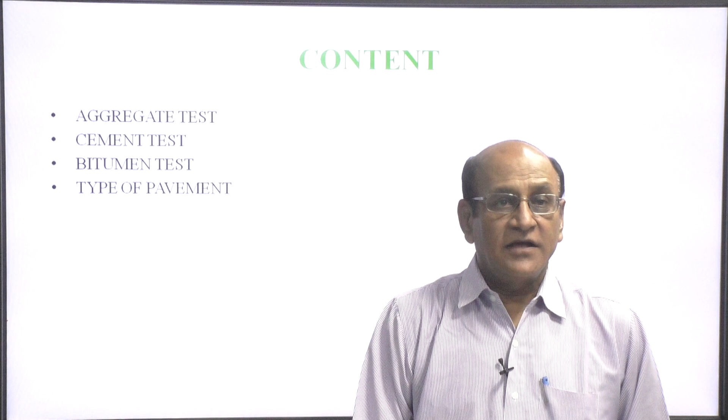There are 4 types of tests carried out for the construction of highways. These are the pre-tests, which include subgrade test (soil test), aggregate tests, cement test, and bitumen tests. We have already covered subgrade test, that is, soil test.

Now we are going to discuss aggregate tests. There are various types of tests required for the aggregate used in the construction of highways, like strength, toughness, hardness, durability, shape, gradation, water absorption, specific gravity, and bitumen adhesion.

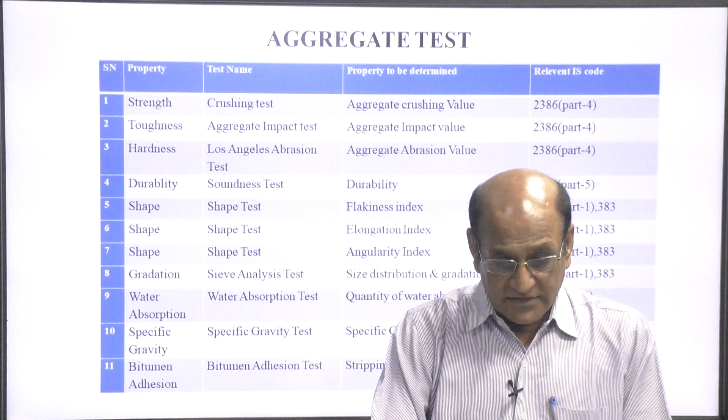These are the properties required to test before starting the work. Here is the chart showing what properties are required, the name of the test, the property to be determined, and the relevant IS code by which we conduct the experiment. We will discuss one by one.

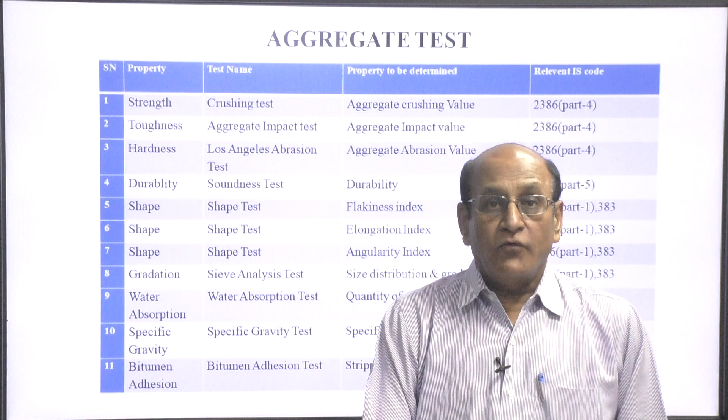The first is strength, and strength is carried out by the crushing test. The value we get is the aggregate crushing value, and the relevant IS code is 2386 part 4.

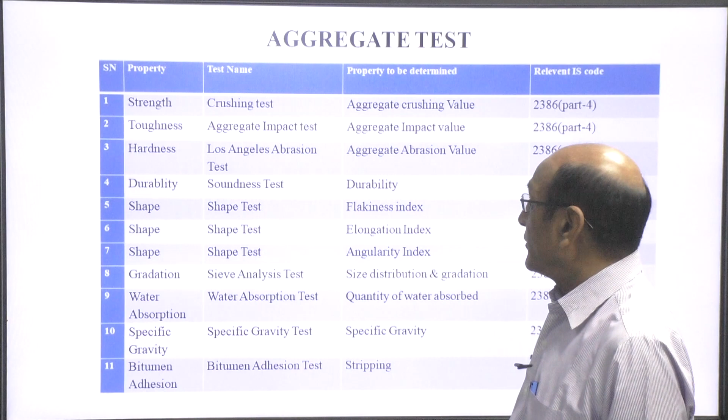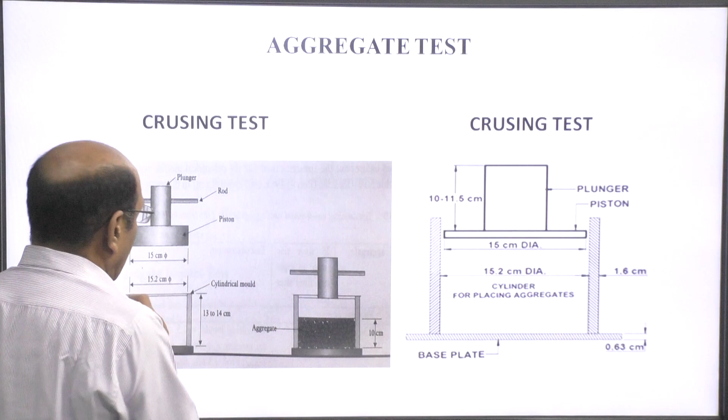This is the cylinder mold that we have already discussed. The sample placed in the mold is 10 centimeter. This is the aggregate, means the sample.

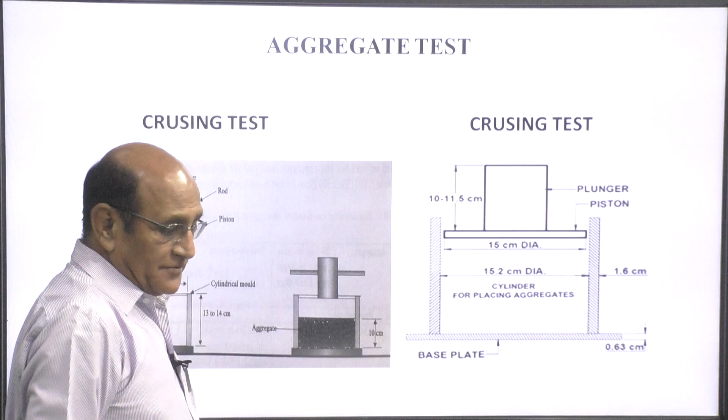The sample that we have taken for the test should pass through a 12.5 mm sieve and retain on a 10 mm sieve.

First of all, we place the sample in 3 layers, and that has been compacted by a tamping rod with 25 blows, done in 3 layers.

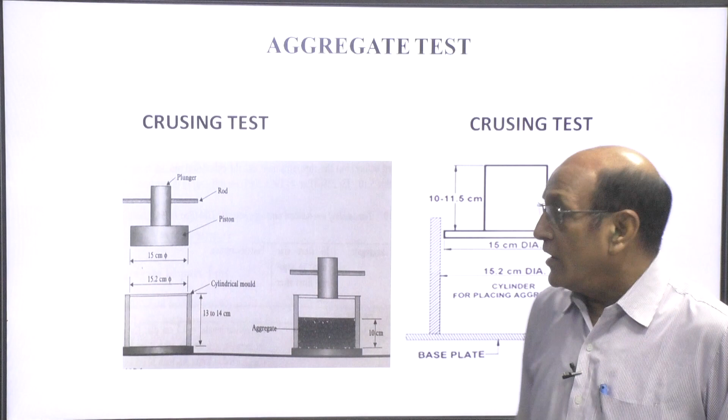After placing and compacting the aggregate, the load is applied through the plunger, and 40 ton load is applied at the rate of 4 ton per minute, up to 40 ton.

After application of the load, the sample is withdrawn from the cylinder and passed through a 2.36 sieve. The passed material is weighed, and the crushing value is obtained by the weight of the sample passed through the 2.36 sieve divided by total sample weight, multiplied by 100.

For bituminous work, the crushing value should not be more than 30%, and for granular base and sub-base, it should not be more than 45%. So this is our crushing test. Now, next is the impact test.

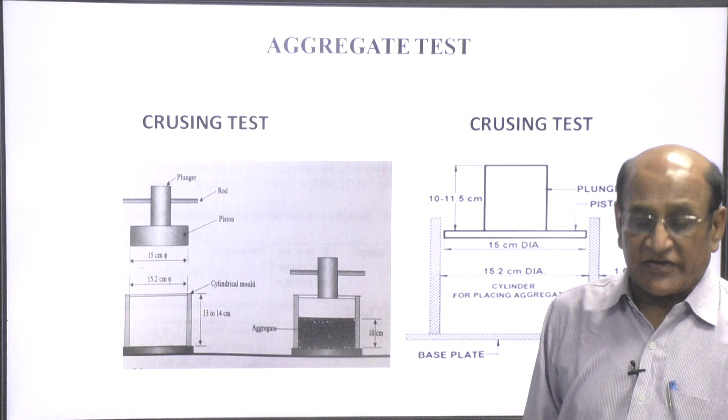Impact test is very important for road construction because the vehicle will impact the road surface when there is a pothole or a speed breaker. So impact load comes on the pavement surface, and that should be evaluated before starting the work.

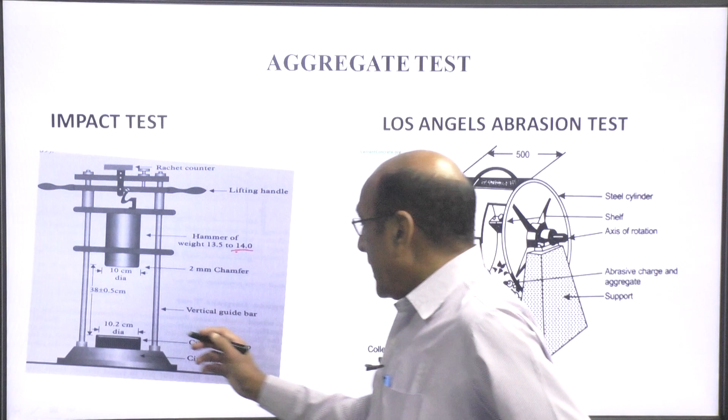The sample is again passed through a 12.5 sieve and retained on a 10 sieve. The sample is again compacted in 3 layers of 25 blows.

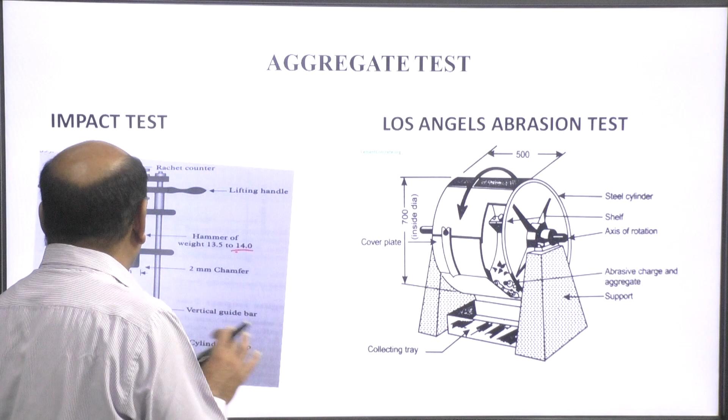Now the hammer is released through the vertical guide bar for 15 times, and again the sample is withdrawn from the cup and passed through the 2.36 sieve.

Again, the impact value shall be the weight of passed material through the 2.36 sieve divided by the total weight of the sample, multiplied by 100.

For bituminous work, the impact value should not be more than 35%, and for other types of work, means granular work, it should not exceed 45%. So this is the impact test.

Now the third one is the Los Angeles abrasion test. There are two types of shearing action going on the pavement surface. First is called abrasion and second is attrition. When two materials like wheels and the pavement surface rub, that produces abrasion, whereas the mutual rubbing between the aggregates is attrition.

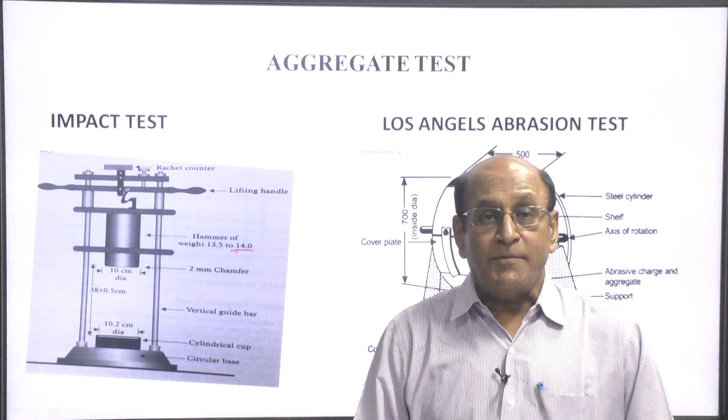This is very important because this type of action is going on all the time on the pavement surface. So this should be tested by three methods: the Los Angeles abrasion test, the Deval abrasion test, and the Dorry abrasion test. We will discuss the Los Angeles abrasion test.

Here there is a cylindrical steel cylinder having 70 centimeter diameter, width 50 centimeter. This is the shelf and this is the axis of rotation. These are the chargers, generally 12 chargers are put in the cylinder to create a simulation of the actual site.

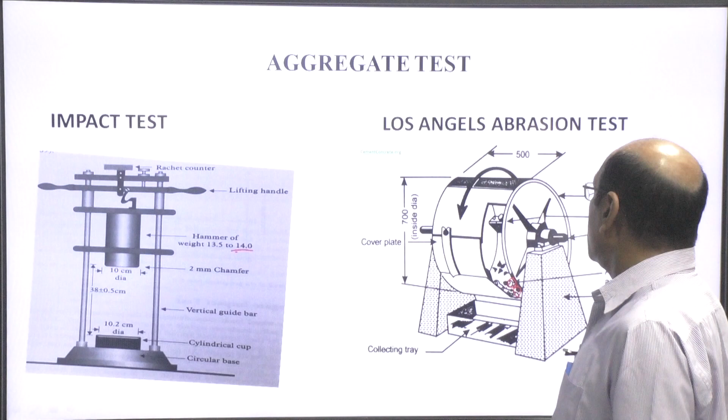The diameter of this charger, a steel ball, is 4.8 centimeters and weight is 390 to 445 grams. Generally 12 balls or chargers are kept in this cylinder. This is the cover plate by which we can load or unload the sample. This is the axis of rotation.

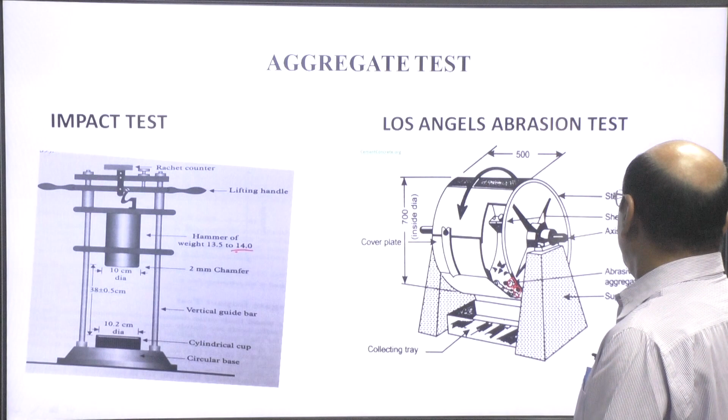So, 5 to 10 kg samples are kept in the cylinder, and then this is rotated at the rate of 30 to 33 rpm, and 500 to 1000 revolutions are made for our tests depending on the conditions imposed.

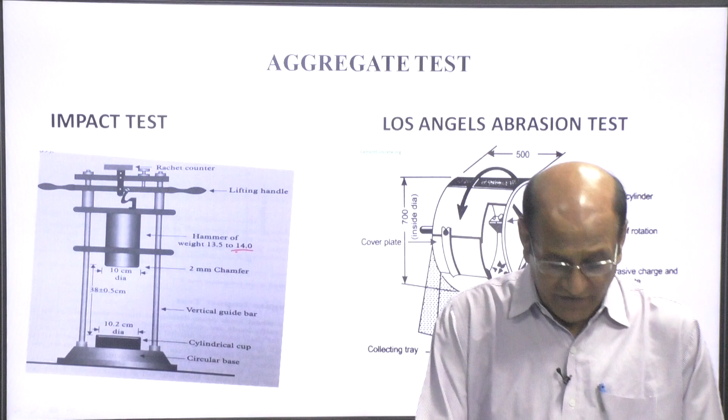So now after the approved number of rotations, the abraded sample is withdrawn from the cylinder, and then it is passed through a 1.7 mm sieve. The abrasion value is the weight of abraded sample passing through the 1.7 mm sieve divided by total sample, multiplied by 100. That gives the Los Angeles abrasion value, and for base course that should not exceed 50%, and for high quality work that should not exceed 30%.

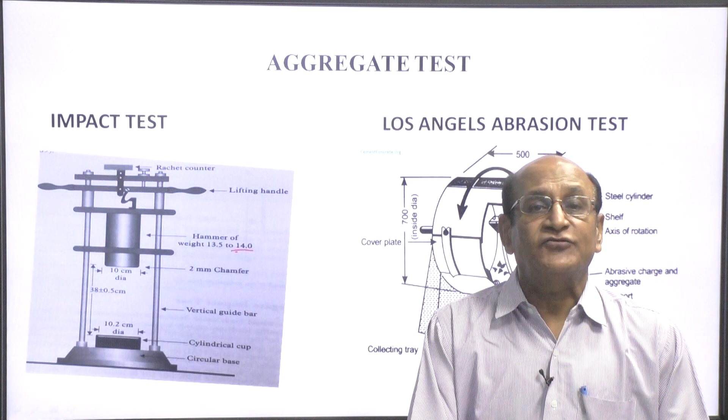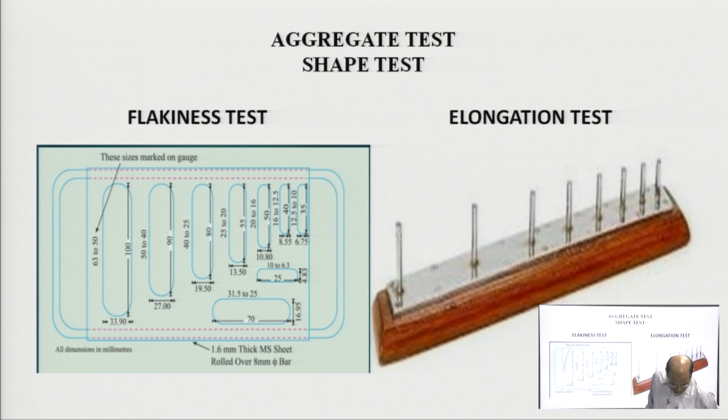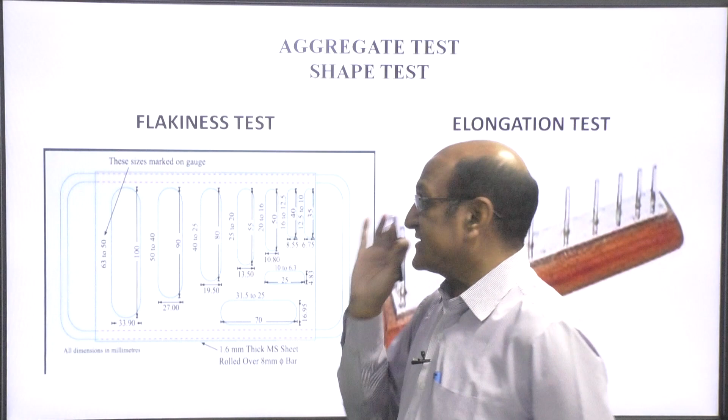The flakiness index is the percentage by weight of the aggregate whose least dimension is 0.6 of the mean dimension of the aggregate. So this is a slot of 3 by 5, the mean dimension, through which the stone aggregate is passed, and the value is calculated as the weight of the sample passed through the slot divided by the total sample, multiplied by 100. By this method we can calculate the flakiness index.

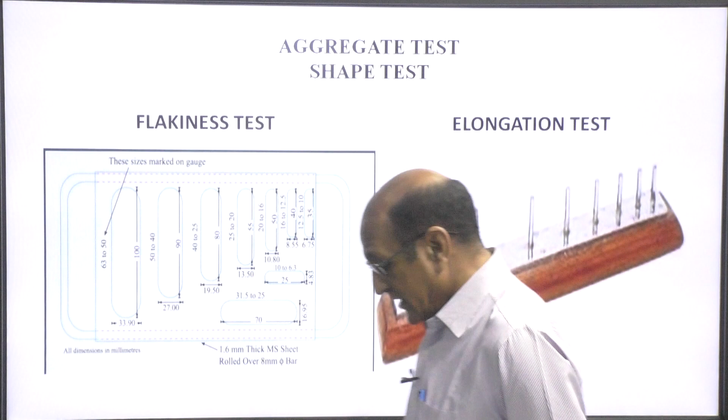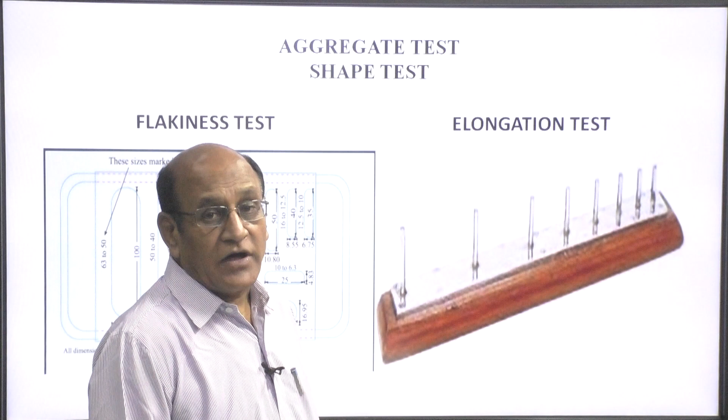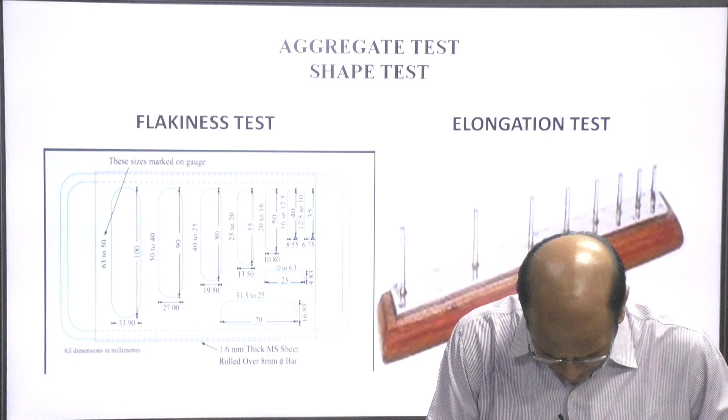This is the elongation test. It is the percent by weight of the sample whose greatest dimension is 1.8 times the mean dimension. By this method we can calculate the flakiness index and elongation index, and the maximum limit for both should not exceed 15%.

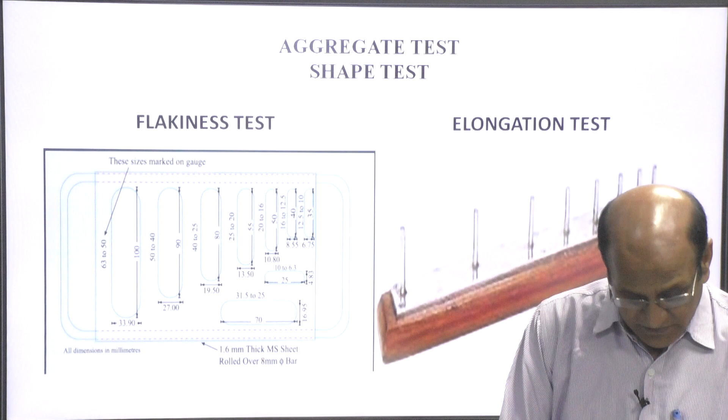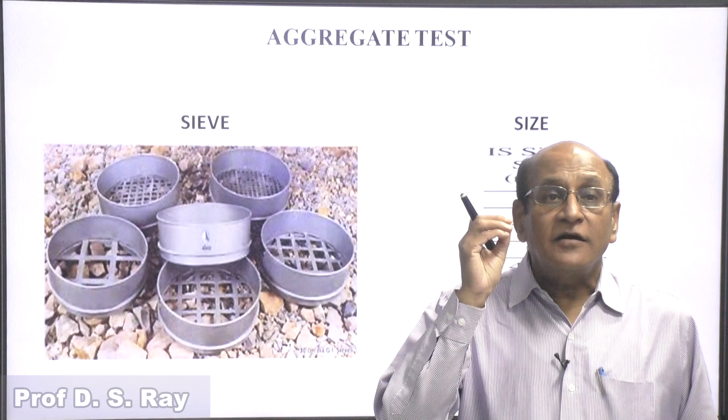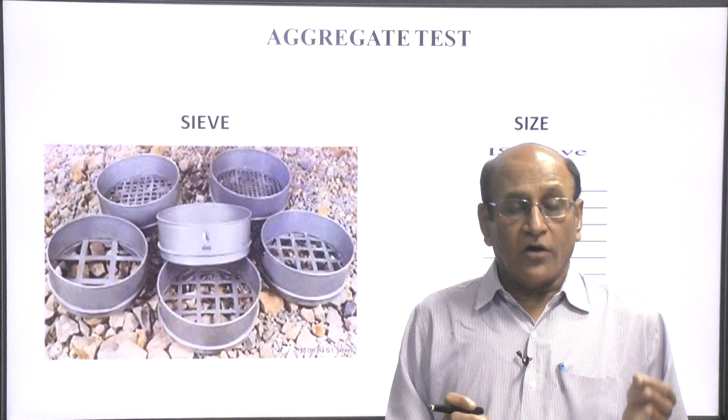For the purpose of testing aggregate, the range which is required is selected, and one extra top sieve and one extra bottom sieve are also placed for the sieve analysis. After putting the sample in the sieve, it is placed over the shakers and the sample is properly shaken, then it is withdrawn and tested again. The weight passing divided by total sample gives the percentage of material passed through a particular sieve. So this is the sieve analysis.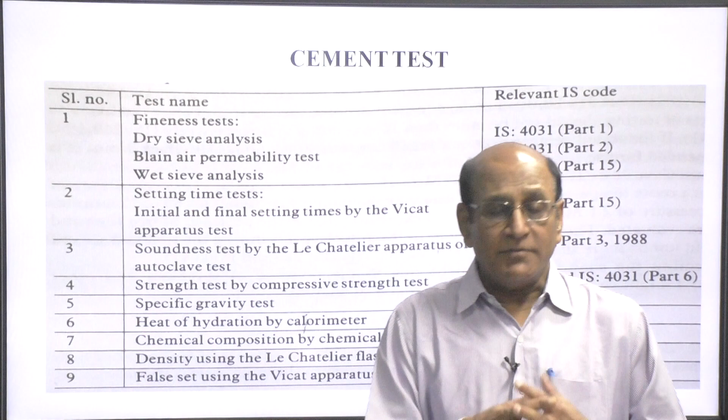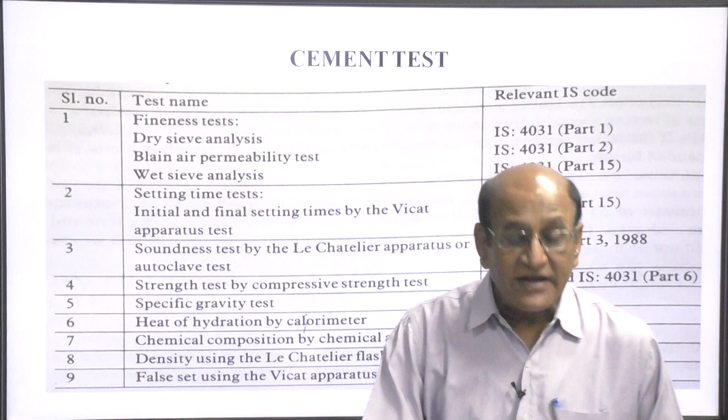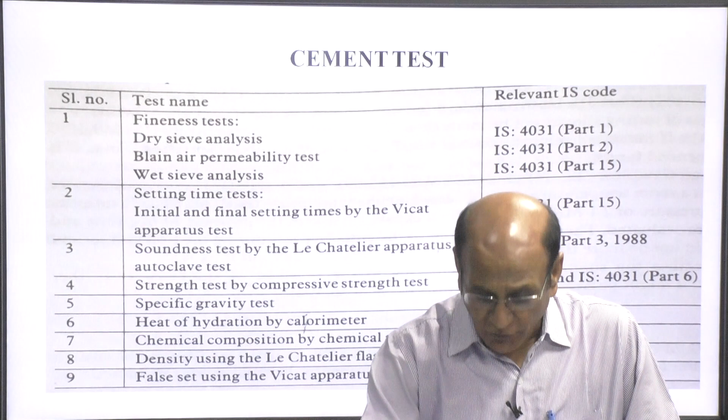Now come to the next test, cement, which is very important because it is used for construction of rigid pavement, the main raw material being cement. Even in flexible pavement, some structures like bridges and culverts are constructed with cement. We will discuss the different tests here, with the relevant IS code also given, starting with the main tests, which is the fineness test.

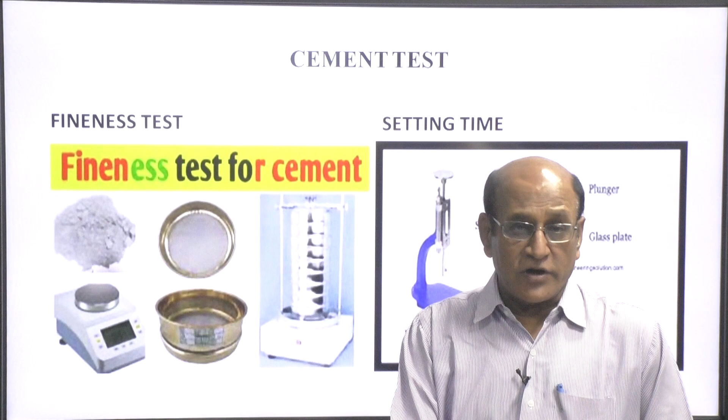This is the fineness test which has been carried out. This is cement and these are the sieves. A 100 gram sample is allowed to pass through a 90 micron sieve, then it is sieved for 15 minutes, and the percentage of passing is calculated. The residue should not exceed 10% for OPC or any Portland cement, 5% for RHC and 5% for PPC. This is a simple test, but it is a must to carry out before starting the work.

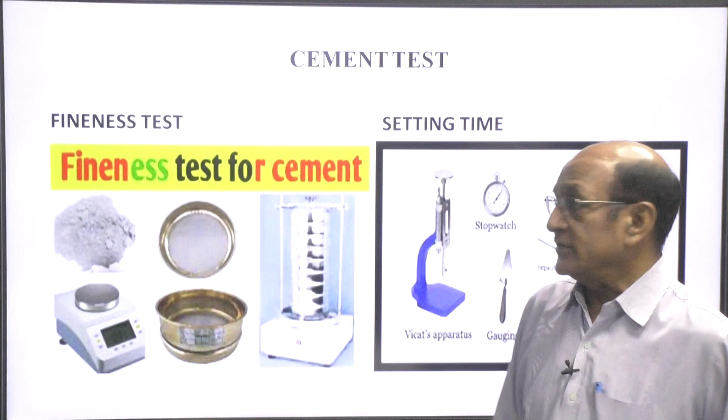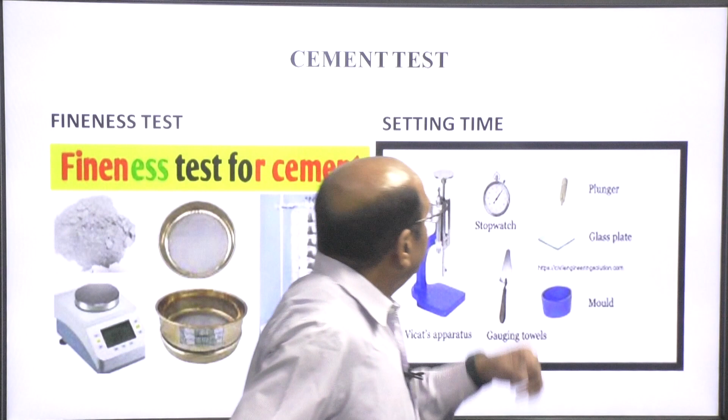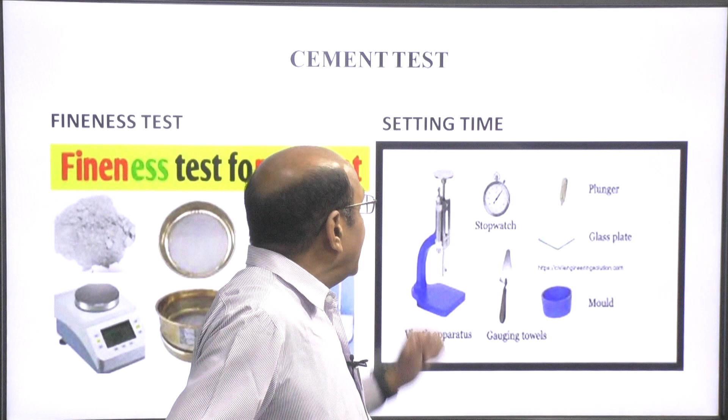The second test is setting time, which is also very important. This is the Vicat apparatus by which we test the setting time: the plunger, glass plates, molds, and a stopwatch. For setting time, the solidification of the plastic cement paste stiffens to such an extent that the Vicat apparatus needle will only penetrate the sample up to 5 plus minus 0.5 mm. That is the initial setting time.

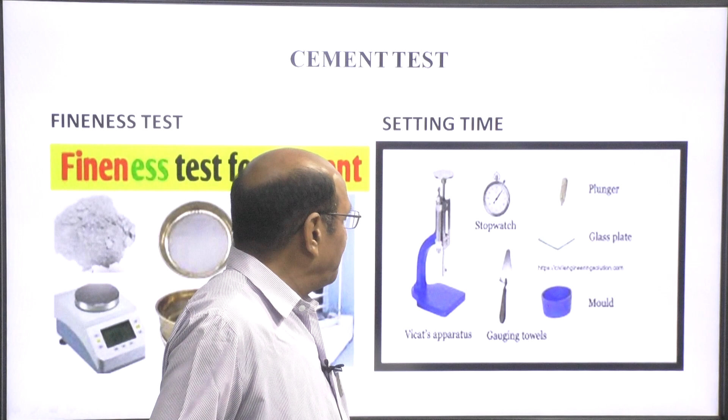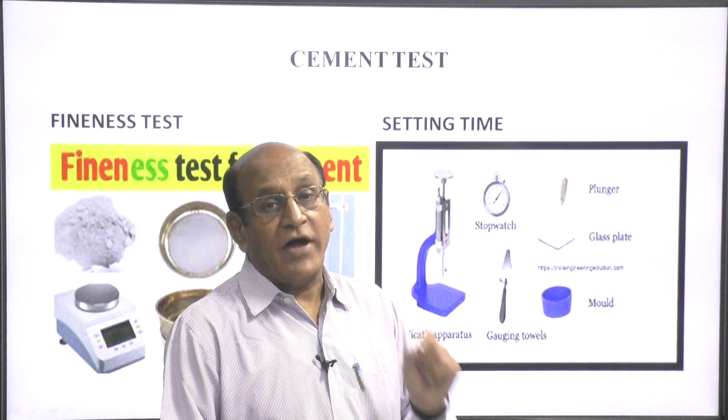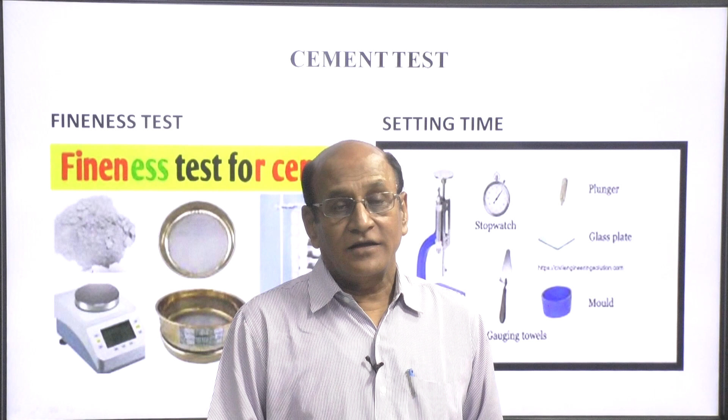This is the mold. The mold diameter is 5 centimeters and the thickness is 4 centimeters, in which cement paste is placed. For the final setting time, if the needle is released to penetrate the sample and it does not mark, that time is the final setting time. It means at the final setting time we cannot change the shape of the structure made by the cement. So this is the setting time: initial setting time and final setting time.

Then there is the soundness test, which is a very important test, because if your cement is not sound, there will be a wide change in volume, which creates a great problem for the structure.

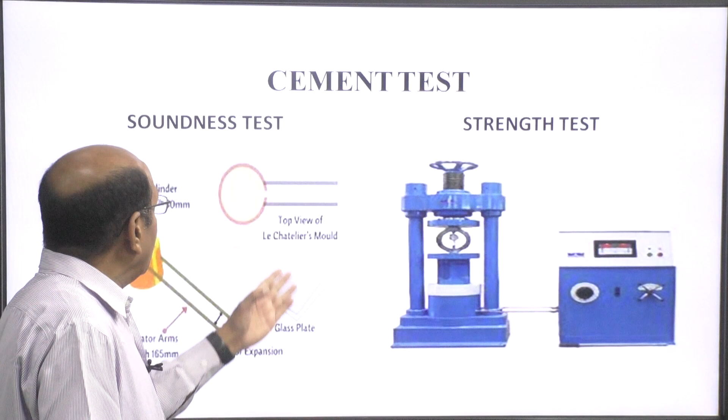This is the split cylinder, 30 mm dia and height is also 30 mm. This is the indicator arm of length 165 mm, the length of expansion. This is the glass plate, top view of the Le Chatelier mold, because this test is carried out by the Le Chatelier principle, using the Le Chatelier mold.

So what happens: the mold is placed over the glass and filled with cement paste, 100 grams of cement and 0.78 times of water, then covered with a glass sheet and submerged in water at 27 to 32 degrees for 24 hours. Then the mold is taken out and again submerged in boiling water for 3 hours, cooled down, and the distance between the indicator points is measured.

The difference between the indicator points will show the soundness of the cement. This is the soundness test and it is a very important test, because if there is unslaked lime or slaked lime, it will create a problem when water comes in contact with the cement residue.

The next test is strength. The specimen is a 70.6 mm cube having 5000 square mm of surface area. A 1:3 ratio of cement and sand with water is mixed at 27 plus minus 2 degrees centigrade, with a quantity of cement of 185 grams, sand 555 grams, and water P/4 plus 3.0, where P is the water for normal consistency.

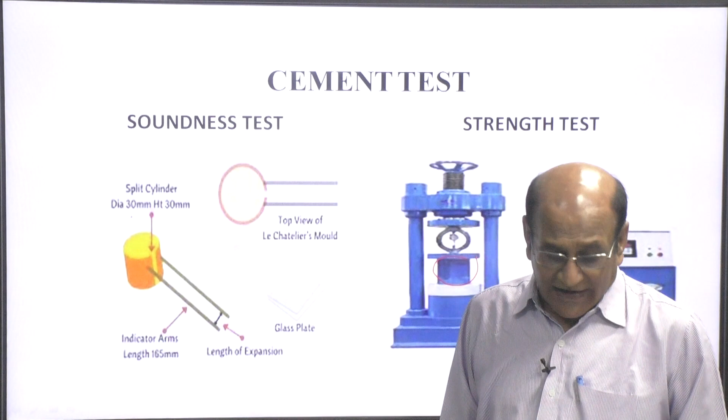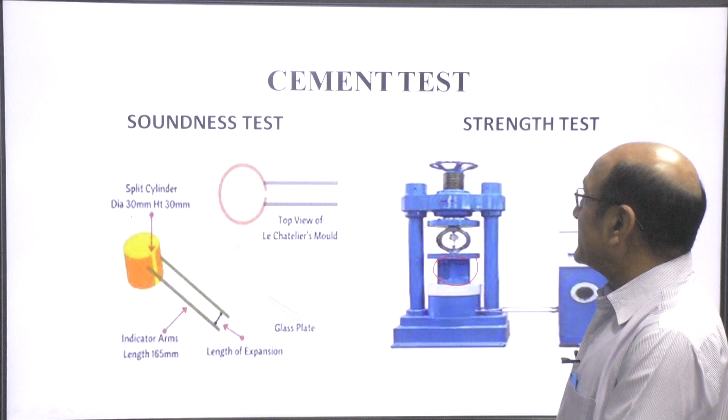Now the mold is filled with the paste. The vibration table is allowed to shake for 2 minutes, and after removing it, the mold is placed over the compression testing machine. The load applied is 35 Newton per square mm per minute. The strength is found by the total load divided by the area, which gives the stress, the strength of the cement.

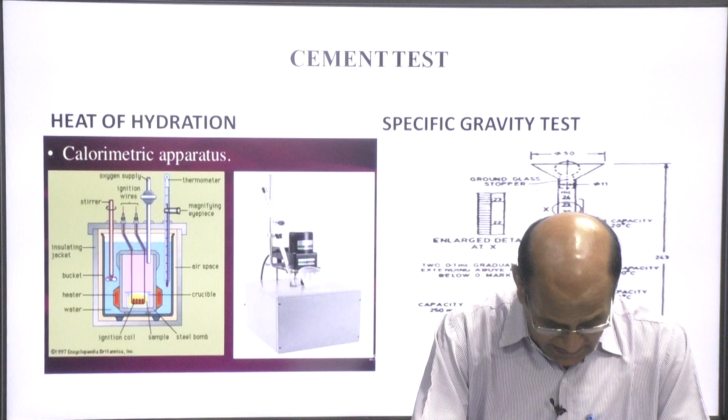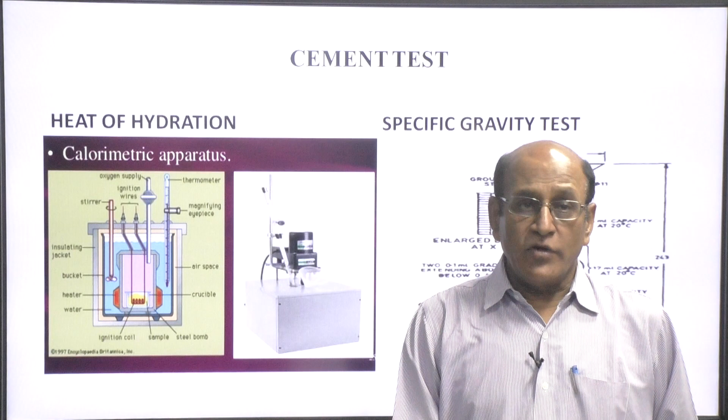The next test is heat of hydration. There are many stages for the heat of hydration. It is calculated using heat capacity, corrected temperature, weight of the sample, and ignition loss, calculated across different stages. Finally we come to the conclusion of heat of hydration, because it is a very long experiment, so we will conclude by just showing the sample here. This is the calorimetric apparatus by which we calculate the heat of hydration.

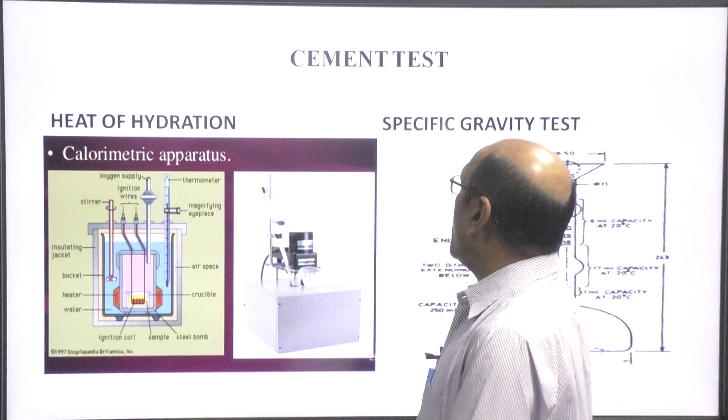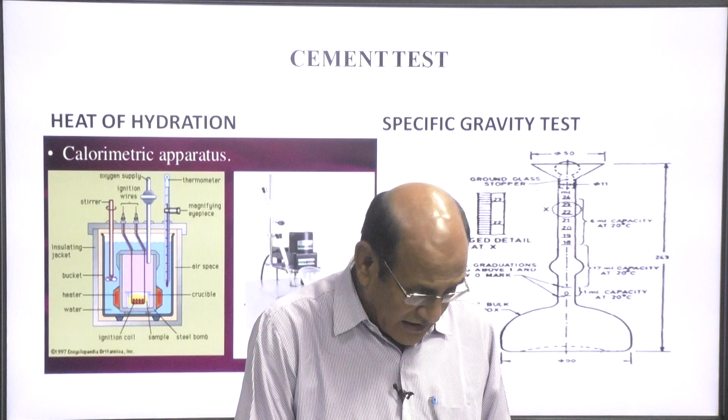The next test is the specific gravity test. The specific gravity is found by the weight of the cement divided by the displaced volume of liquid in milliliters, which gives the specific gravity.

There are many tests carried out for cement, but for practical purposes these tests are only carried out in the field.

Now we come to the bitumen tests, and there are many bitumen tests which are carried out. These include the needle penetration test, softening point test, flash and fire test, viscosity test, ductility test, float test, loss on heat test, solubility test, spot test, water content test, TFO test and RTFO test. These are the tests generally carried out for bitumen.

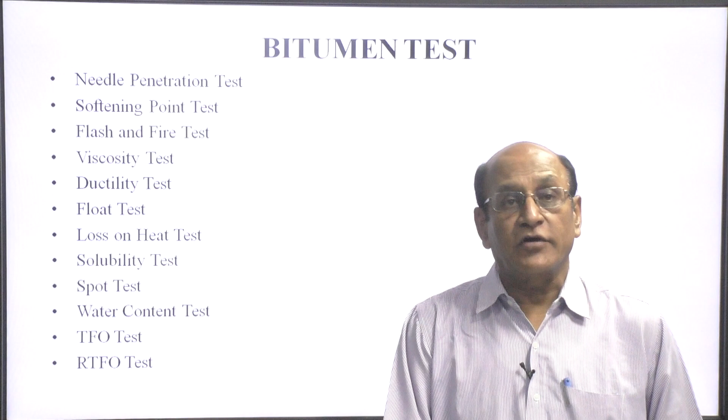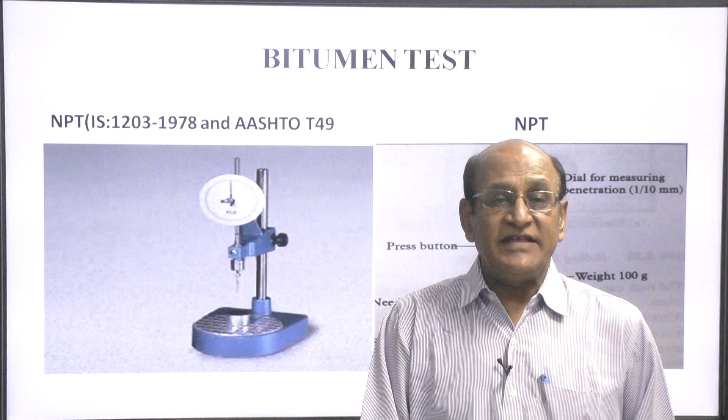We will discuss these in brief. This is the needle apparatus for the needle penetration test, and bitumen is named after the penetration value, like penetration grade 80 by 100, meaning the needle penetration lies between 80 and 100. This type of test has been carried out and bitumen named after this penetration value. But now all Indian companies like Indian Oil Corporation, HPCL, BPCL have changed, and now bitumen is named based on viscosity grade, VG grade, like VG 20, VG 30, VG 40. So the naming has changed, but this is still the very basic test.

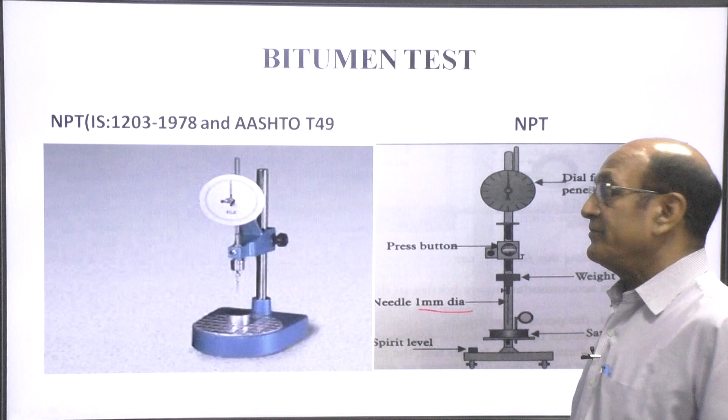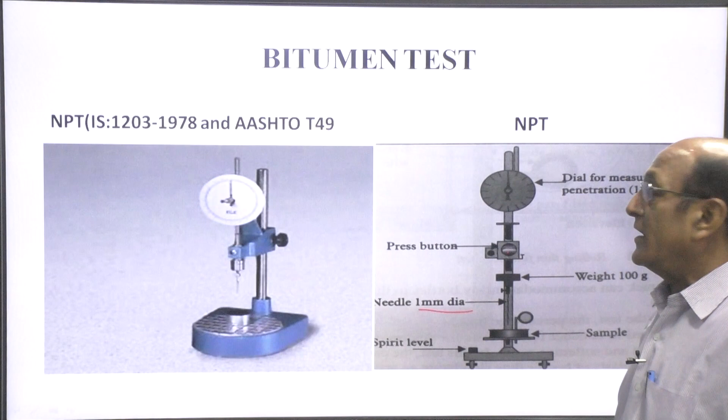Here you see the 100 gram weight and the needle, which is 1 mm. This is the sample placed in a cup, and this is the dial for measuring penetration, calibrated not in millimeters but in 1/10 of a millimeter. The sample is placed below the needle, which is positioned just above the sample level. Then this press button releases the weight, and after 5 seconds it is pressed again, so it stops at once. The dial gauge then represents the penetration value in 1/10 of a millimeter.

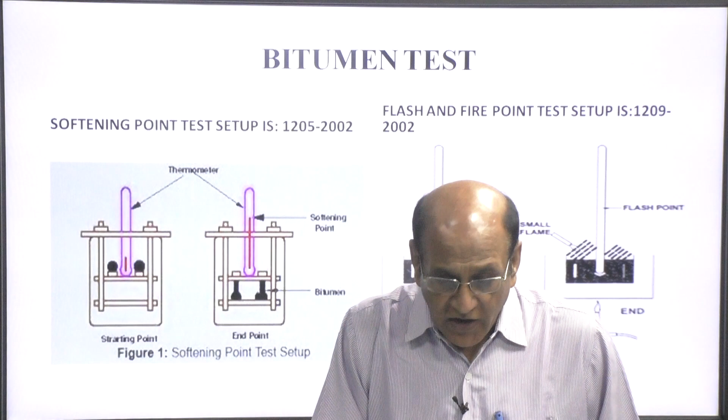This is the softening point test setup in which the softening point is calculated. This is the flash and fire point test. This is the minimum temperature at which, for a very small instant, there is a flash, and at the fire point there is ignition.

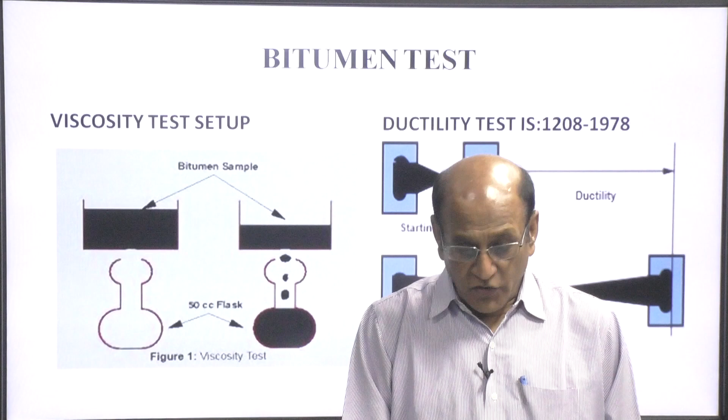Then the ductility test, in which the sample is pulled 50 mm per minute up to the end point when the thread breaks. That gives the ductility value.

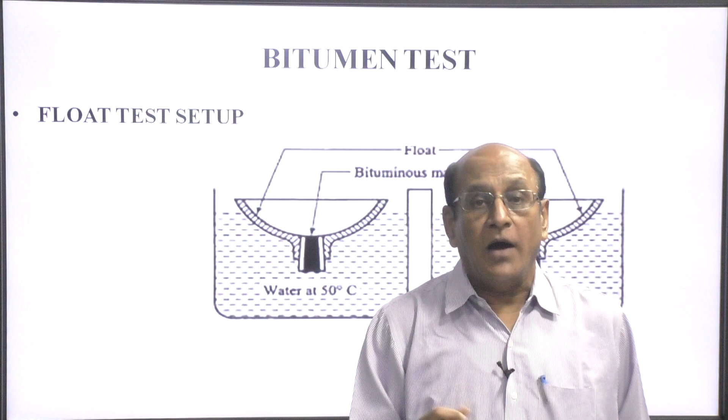This is the float value test. There is a brass and aluminum float in which the sample is kept, and it is kept in a water bath at 50 degrees, forcing water to come up. That time gives the float value.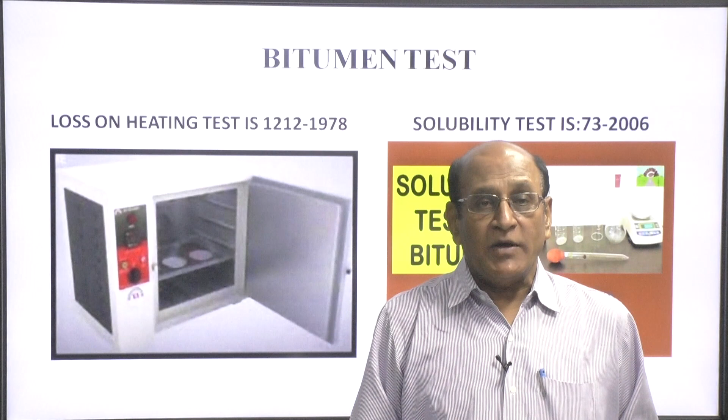The solubility test - the bitumen is made soluble in carbon tetrachloride or carbon disulfide, and the residue gives the solubility value.

This is the spot test. A 2 gram sample is dissolved in naphtha, and a drop of this solution is placed on paper. After 24 hours, if it shows a regular color, it is uncracked; if there is some deformation in shape and color, then it is cracked.

For the water content test, any water content present is heated and the vapor is collected, then cooled down to recover the water. This gives the water content, which should not exceed 0.2%.

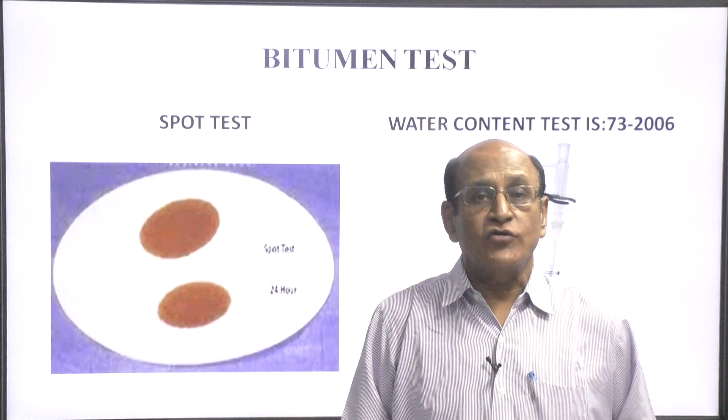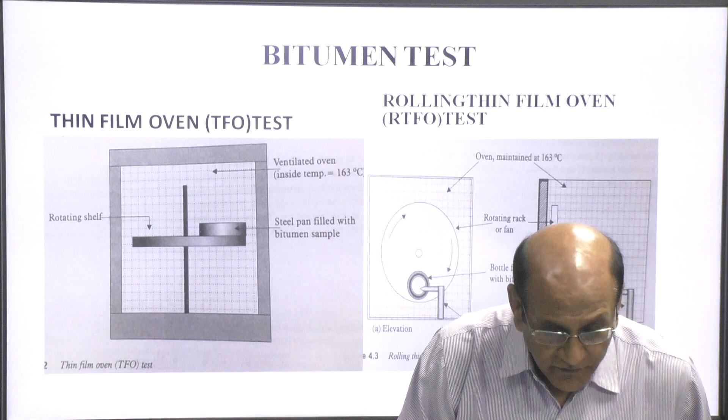This is the thin film oven test, an important test that is carried out. This is the horizontal rotating shelf on which the sample is kept in a 140 mm disc up to 5-10 mm thickness, and it is rotated, then the loss is calculated.

This is the rolling thin film oven test. It is rotated in vertical alignment, and to accelerate the rate, hot air is passed through it, and then it is weighed again.